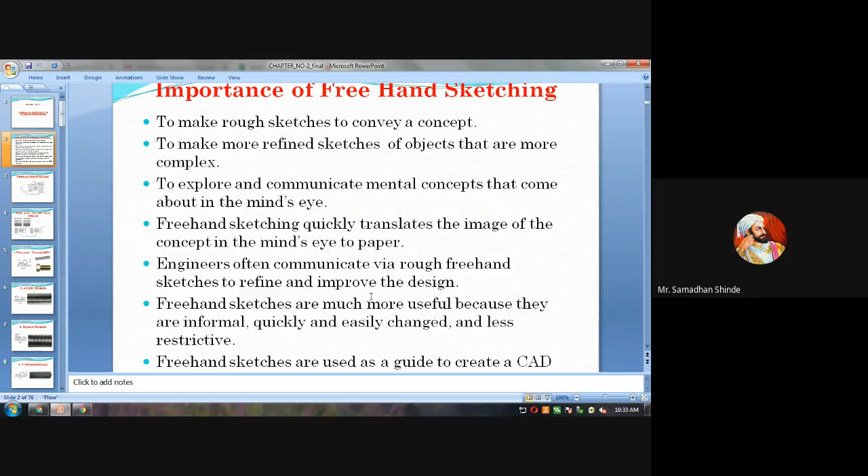Chapter 2, freehand sketching of machine components. We studied first the importance of freehand sketching, irrespective of having n number of tools to draw the drawing, softwares, etc. Still we have this chapter in the syllabus because we discussed making a rough sketch to convey the concept. If we want to draw the rough sketch, we should have the knowledge of freehand sketch.

To make the more refined sketches, a particular drawing is more complex, it cannot be possible to understand easily. So in that case, we can draw a simple drawing instead.

Then, to explore and communicate mental concepts. If an idea is there in your mind and you want to do something, you can put it on paper directly. Freehand sketching quickly translates the image, meaning if some concept is there in your mind, that concept can be transferred quickly onto paper. Engineers often communicate via rough freehand sketches to refine and improve the design.

I gave the example of the Innova car. Irrespective of the fact that Innova was liked by customers, they still made inventions or little modifications to the existing model, so the Innova Crysta came into the market. After that, whatever drawing is available, you can go for its modification up to customer satisfaction.

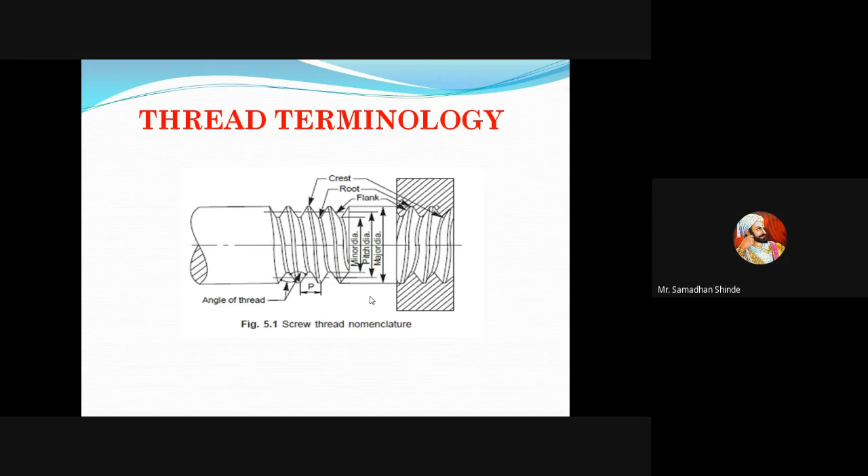We have also seen the basic types of threads: right hand thread, known as RH, and left hand thread, known as LH. So how do you identify, if you hold any nut or bolt in your hand, which is right hand and which is left hand thread? Number one method is orientation.

What does orientation mean? We have to check where the lines are passing from top to bottom direction. From top to bottom, if it is passing towards the right, it is a right hand thread. If it is passing towards the left, it is a left hand thread.

Then there is another method called the rotation method. So first is orientation of threads, another is rotation of nut and bolt. A simple formula to remember: if we rotate the nut or bolt in a clockwise direction and it advances, then clockwise rotation plus advance equals right hand thread.

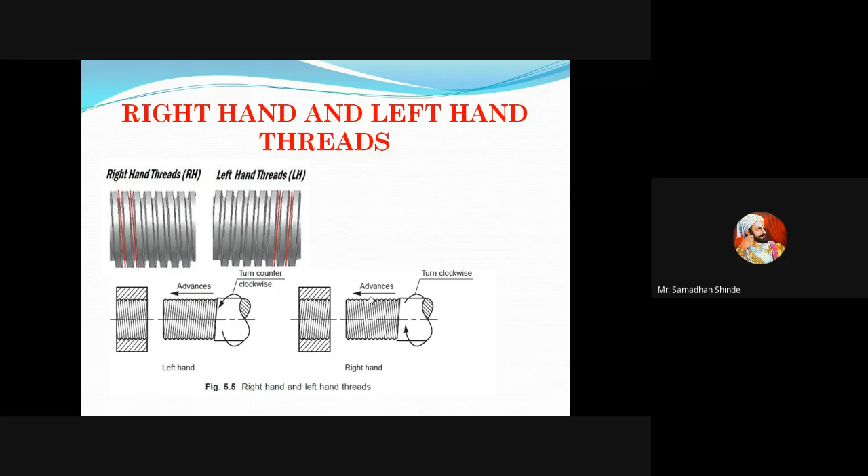If we rotate a nut or bolt in anti-clockwise direction and it advances, then it is a left hand thread: anti-clockwise rotation plus advance equals left hand thread. Clockwise rotation plus advance equals right hand thread. That is the formula.

As discussed, we need to note the angle of thread and the application for each type. With Whitworth thread, the profile is given, angle is 55 degrees, and the application is leak proof applications.

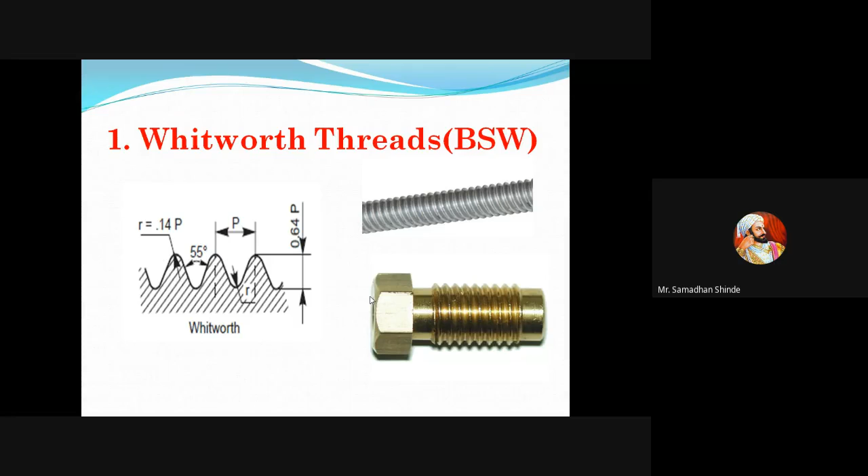Then Acme thread, also called ACME thread. The angle is 29 degrees, and bench vice is the application. In our workshop such types of threads are available.

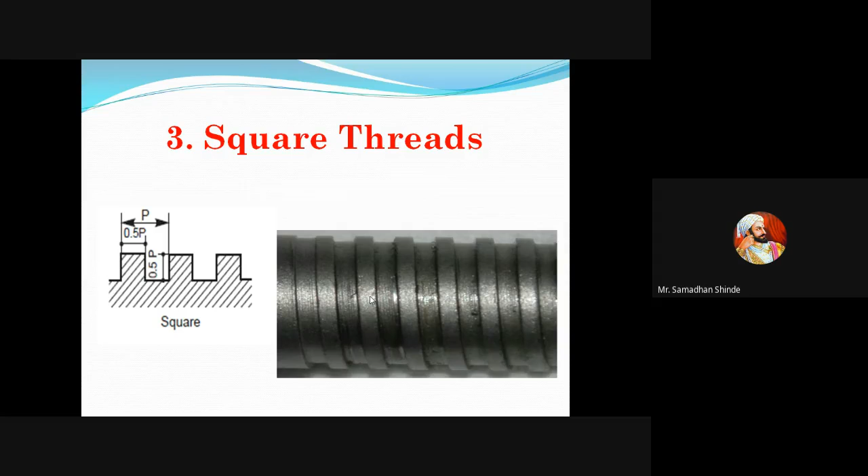Square thread: here the thread angle is 0 degrees, but the profile of the thread is perpendicular to the axis. The application of this is screw jack.

Then V threads, also called sharp threads, or metric thread. The angle is 60 degrees, and nut and bolt is the application.

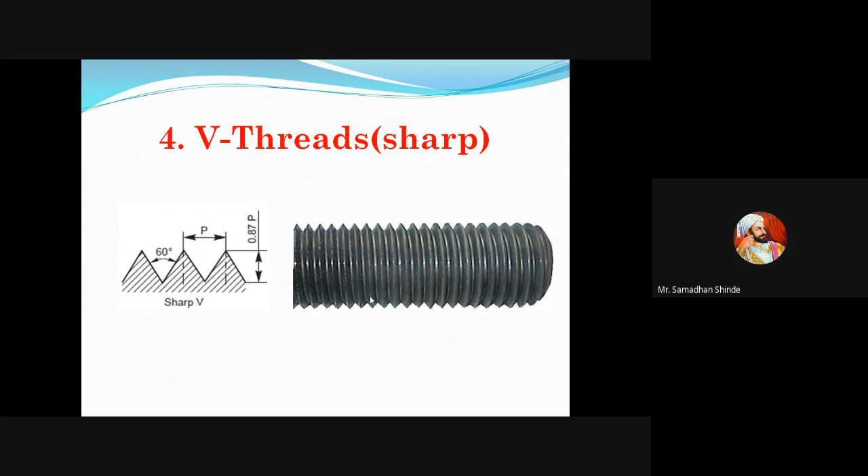Buttress thread: one profile is at 45 degrees and one profile is perpendicular to the axis. The application is conveyors in mills, used when we want one directional power transmission.

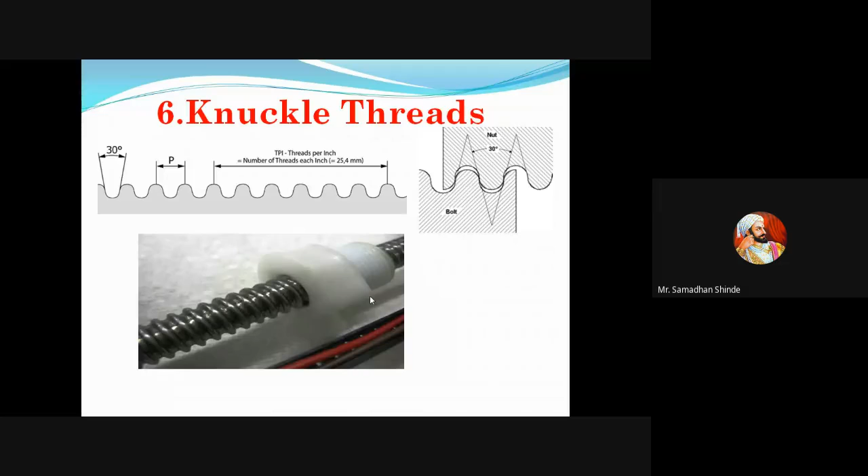Knuckle thread is also called plastic component thread. Mainly these threads are used for plastic components. The angle is 30 degrees.

So that we have seen types of threads. Then we have nut and bolt, types of nut and bolt. In this there are various types of nut and bolt based on types of thread: one is having internal thread, another is having external thread.

Bolts are having external threads and nuts are having internal thread. We have also seen the symbols: for internal thread, the internal circle is complete; for external thread, the external circle is complete. It is as simple as this. To remember: nuts have internal thread, internal circle complete; bolts have external thread, external circle complete. So types of nut, these many types are there.

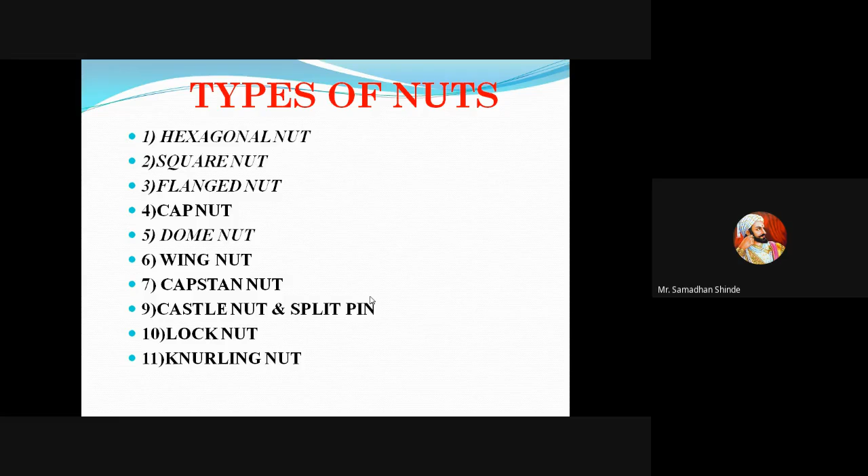First one is hexagonal nut, bounded by hexagonal periphery. We have seen different points in this: how much is width across flat for this nut, and width across corner.

If you remember, thickness of this bolt, T, is equal to D. This dimension we have seen is 1.5D plus 3. Width across flat and width across corner are important terms we have seen: 2D and 1.5D plus 3.

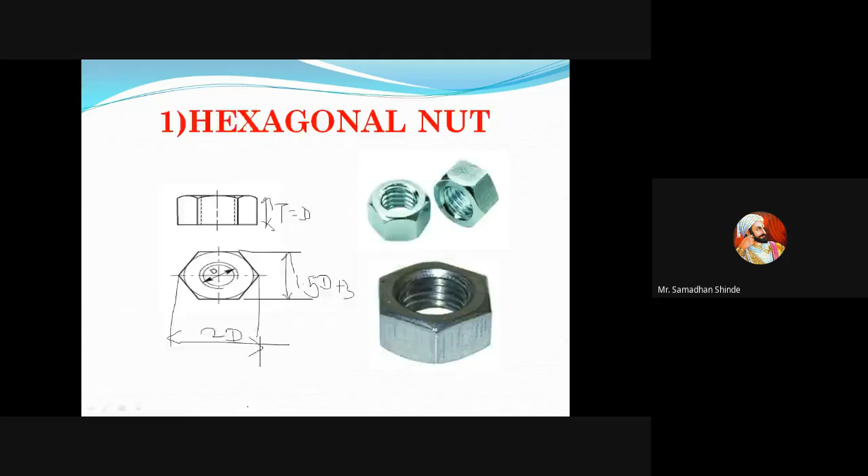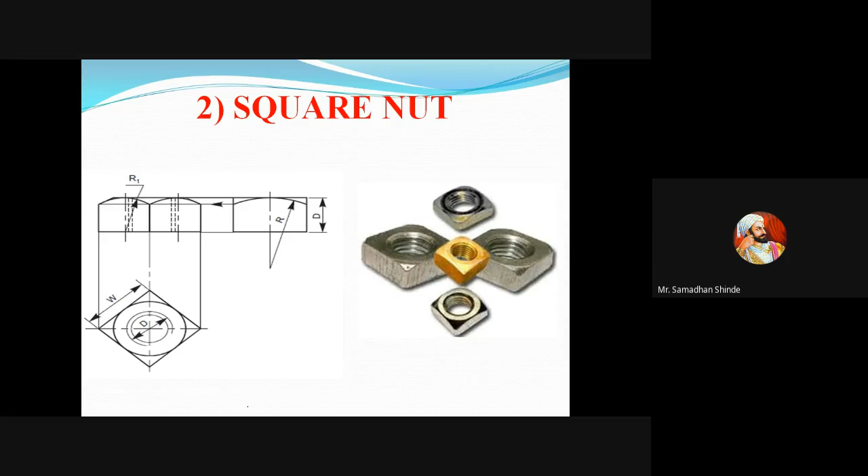Similarly for square nut, instead of hexagonal boundary, it will be bounded by square periphery. Here also same terminology: thickness T equals D, and width across corner and width across flat are the same.

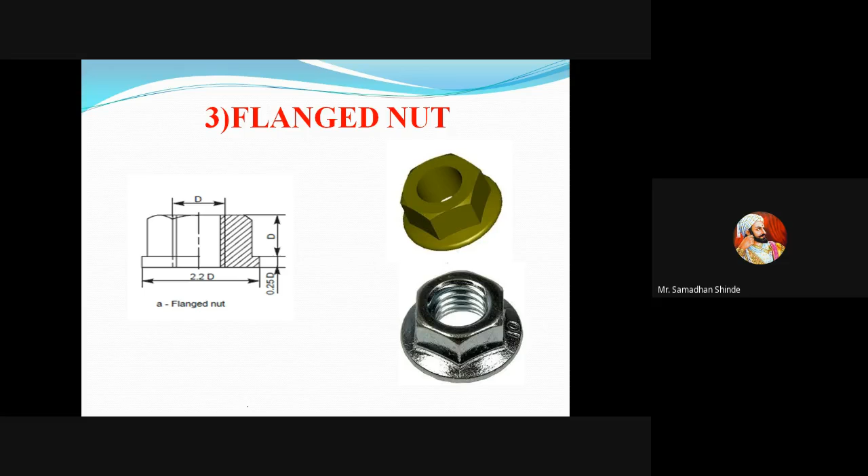Then flanged nut: if a nut has a washer at its bottom, it is called a flanged nut. This nut will avoid use of a separate washer. It's simply a hexagonal nut with a washer only at the bottom, that is the specialty of this nut.

Then dome nut and cap nut. The specialty of these two types of nut is that they will not allow the end of the bolt to come outside the nut, avoiding injury to the operator, especially if these nuts are always in a moving position.

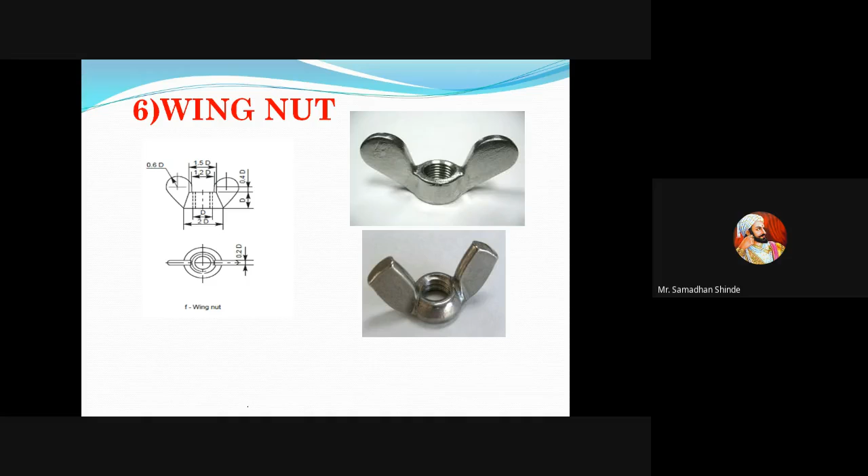That is the importance. Then wing nut: you have to remember wing nut means frequent adjustment. When we want to have frequent adjustment in an assembly, then it is called a wing nut. A famous example of wing nut use is a hacksaw.

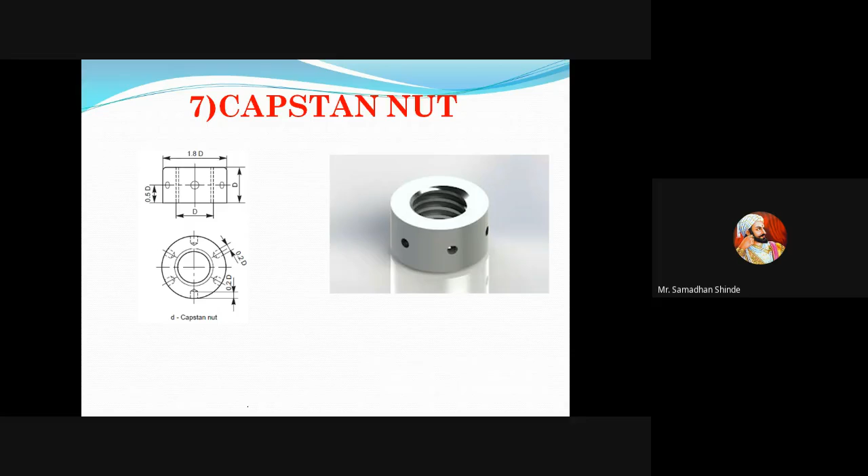Then ring nut, another name is retaining nut. It holds a particular part in its position. In a bicycle, near the handle and pedal, this type of nut is used to hold the particular component in position, called a ring nut.

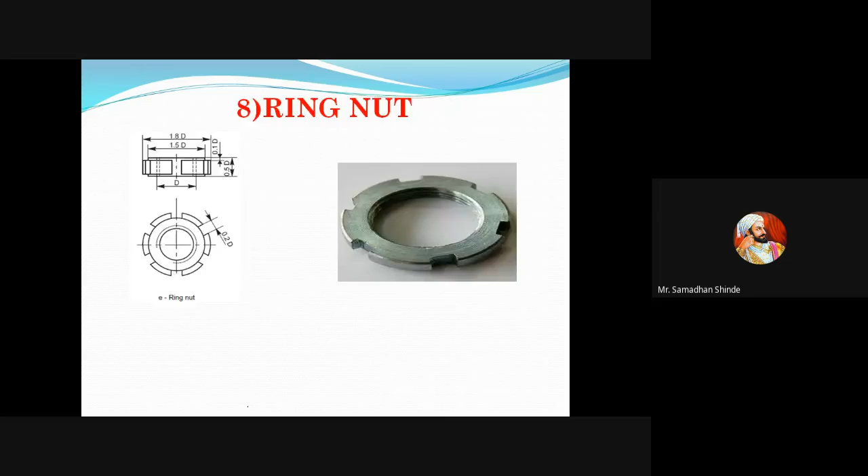Castle nut: two types of nut are there, one is castle, another is lock nut. So what does castle mean, and what is the lock nut?

So what does it mean by castle nut? Castle nut is used whenever there are frequent vibrations, or our particular component is suffering a lot of vibrations. In that case, two types of nuts are used: one is castle nut, another is lock nut. Castle nut is having slots on its periphery at one end, and a split pin is used. This split pin is used to prevent the nut from coming out of the bolt. It is called castle nut.

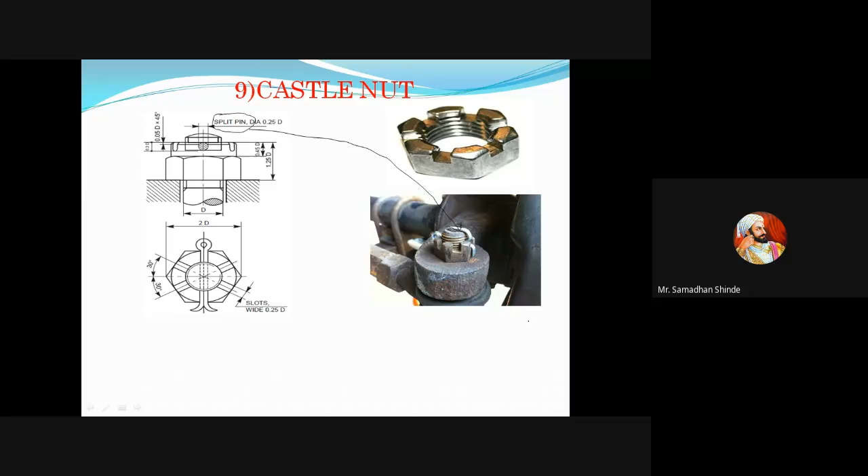Then lock nut. What you have to remember in case of lock nut: one bolt, two nuts - nut number one, nut number two. Whenever there is one bolt and two nuts are used on the same bolt, then it is called lock nut. Same concept applies here - two nuts on a single bolt, only one bolt.

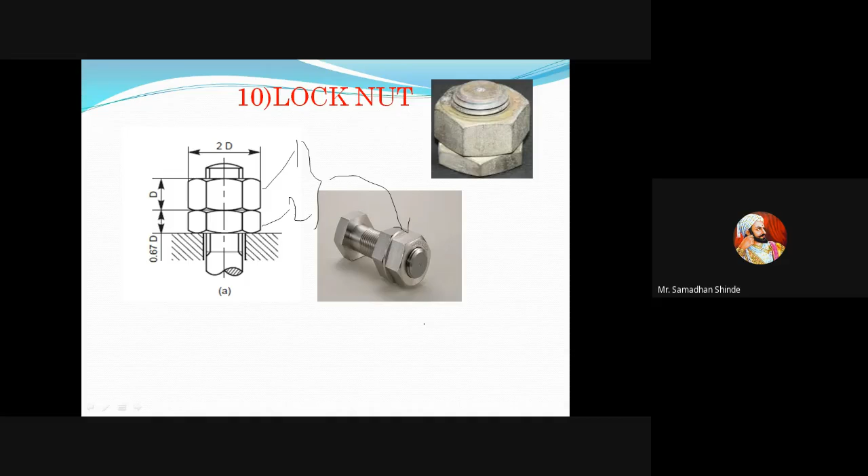So an example we have seen is mirrors of a two-wheeler. Once the two-wheeler is moving, its handle gets a lot of vibrations, and to fix or tighten the mirror with its handle, a lock nut is used.

And the last one we have seen is knurling nut. What does it mean by knurling nut? It is having knurling on its periphery. In BIS convention - maybe day after tomorrow I will take revision of BIS convention - what does it mean by knurling nut? It is having knurling on its periphery. Two types of knurling are there: one is parallel or straight knurling, and diamond knurling.

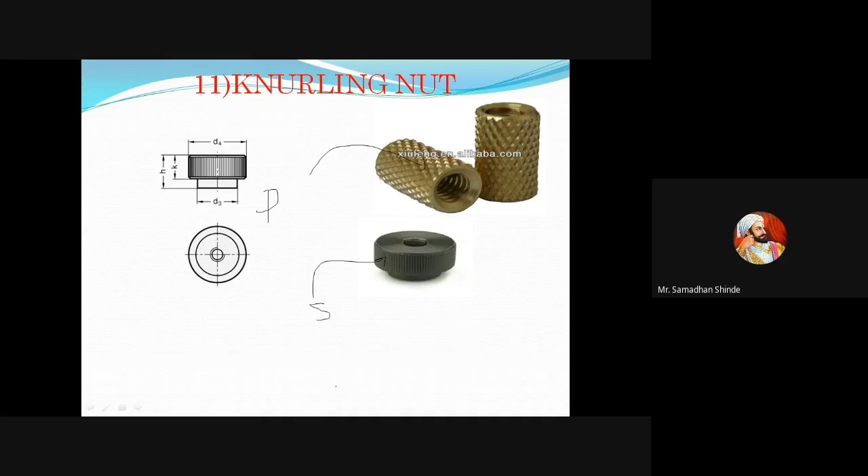Out of that, a cross structure is there, it is called diamond. So first nut is diamond, I will write only D. And another nut is called straight knurling. I will write straight knurling and diamond knurling, like this.

So then we have seen types of bolts. What are the different types of bolts? As far as nuts, we have seen many types; thereafter we have seen bolts. First is square headed bolt. If the head of the bolt is something like this, square, then it is called square headed bolt. Due to availability of limited space, this type of bolt is used.

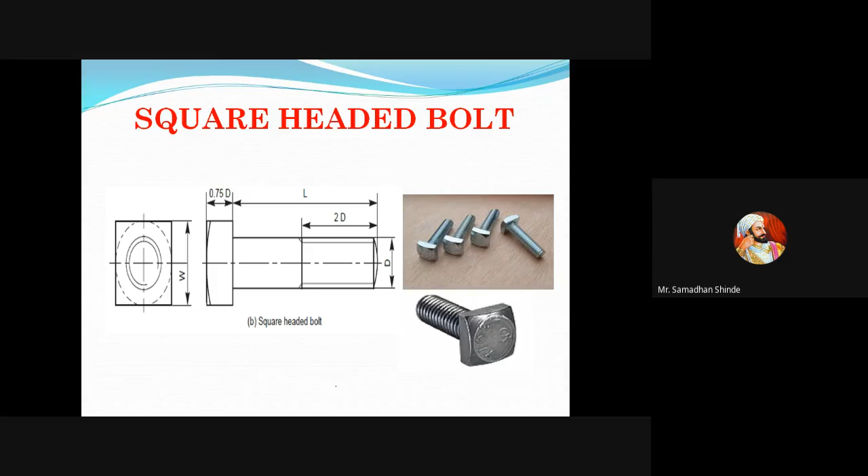And what does it mean by hexagonal headed bolt? Hexagonal headed nut, hexagonal head - that is as simple as the square headed nut. So bolts are mainly classified into: one is head, another is shank. So square headed bolt, hexagonal headed bolt, T-headed bolt - it is used mainly with milling machine.

Whenever there are slots in a machine, means like this - these slots are there. So what does it, like this solid part - I will go for hatching like this. So this part is hollow. So what can be done? This nut is directly taken and placed here, something like T, inverted T. So these type of nuts are something like inverted T - that's why it is called T-headed bolt. It is used in milling machine.

Once we go back to college, many more machines are there whose bed is having something like this T-slotted design. In our machine tool processes subject next semester, you are going to see different types of machines. In that, you will come to know what this T-headed slot is - such slots are there.

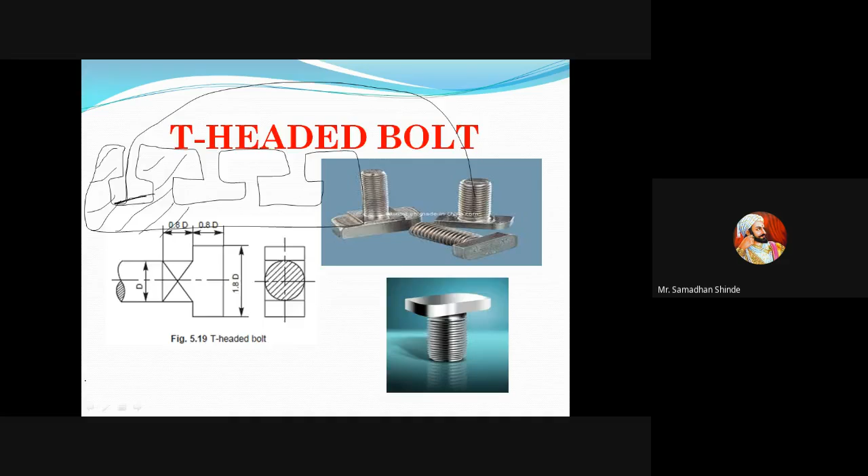Then cup-headed bolt. Cup-headed bolt - limitation of space. Whenever there is limited space, this type of bolt is used. Example is benches - on benches such cup-headed bolts are used.

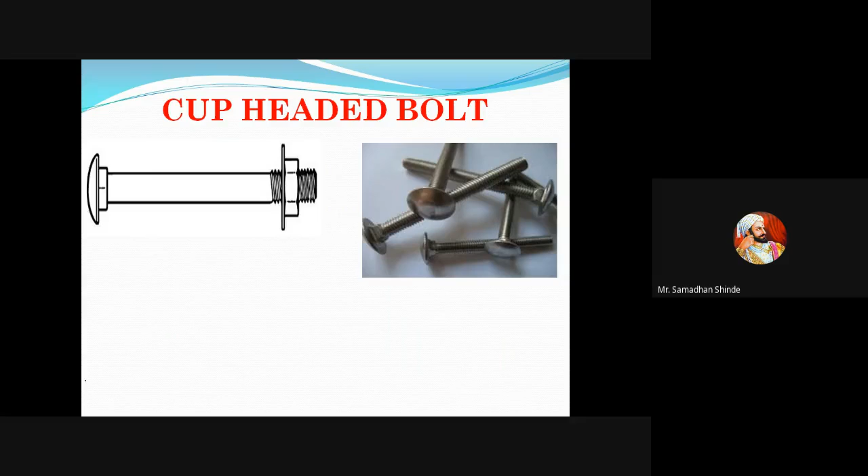Then rag foundation bolt and eye foundation bolt. As the name is foundation bolt, these bolts are used to fix the machine with their foundation. One is a rag, another is eye foundation bolt. So you can remember, to fix the machine with their foundation, these types of bolts are used. What is the working principle of rag foundation bolt?

On its edges there are serrations. Serrations means threading. If you see this large diagram, it's a combination of machine parts - nut, bolt, washer, etc. On its edges there are serrations, and this bolt is fixed into concrete. So once the machine is fixed with its foundation, it will not come outside the foundation easily.

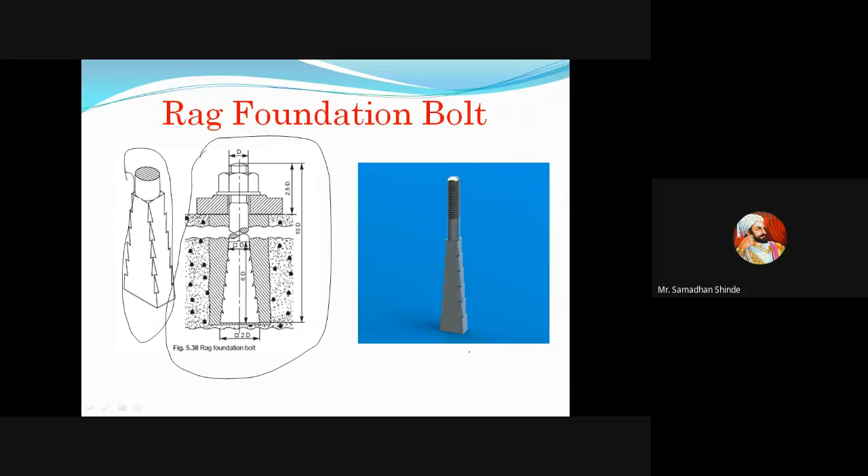That's why it is called a rag foundation bolt. Another one is eye foundation bolt. One of the ends of the bolt is converted into eye shape, and a cross rod is used to fix the machine with its foundation. That's why it is called an eye foundation bolt.

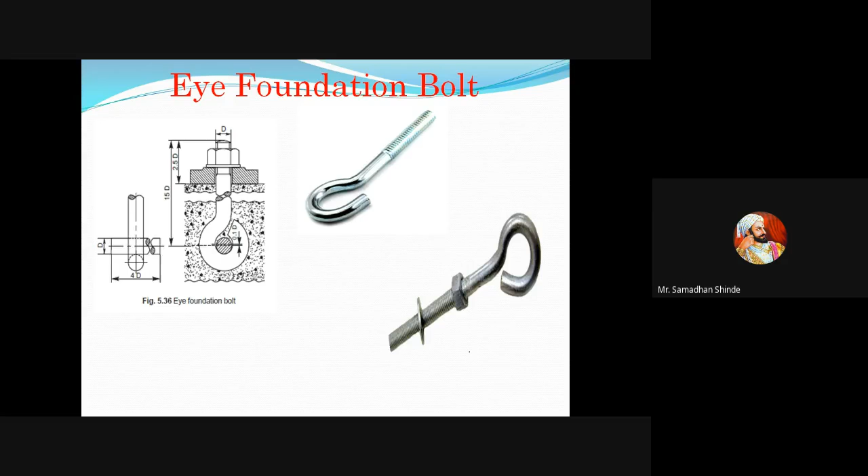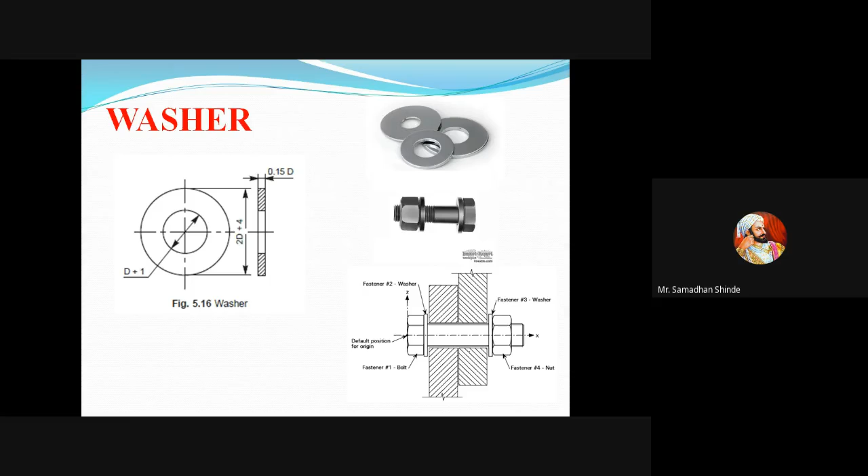Washer - we have seen what it means and where we use it. The main purpose of washer is to increase the contact area between clamping parts. As far as technically, we should remember that once area increases, stress decreases, since sigma equals P by A. Number two, it helps for tight fitting between two parts.

Then we have seen riveted joint. Before that, we saw types of rivets - which are the different types, what is their function, and how are they classified. Mainly, like bolts, rivets are also classified into head and shank.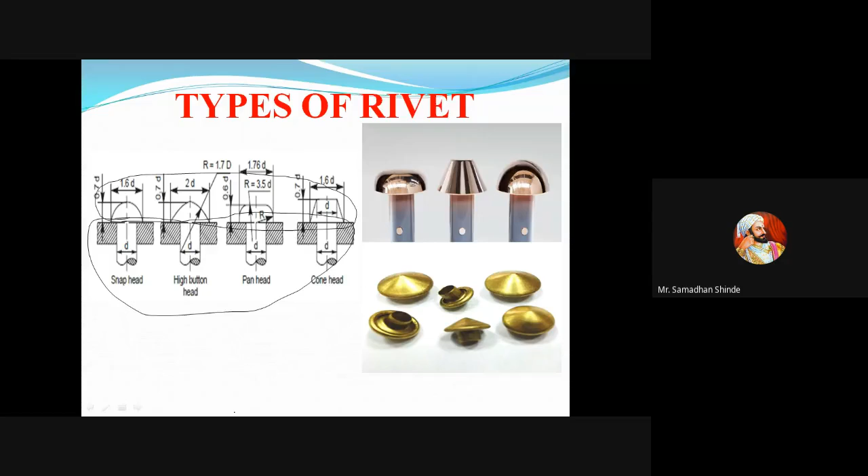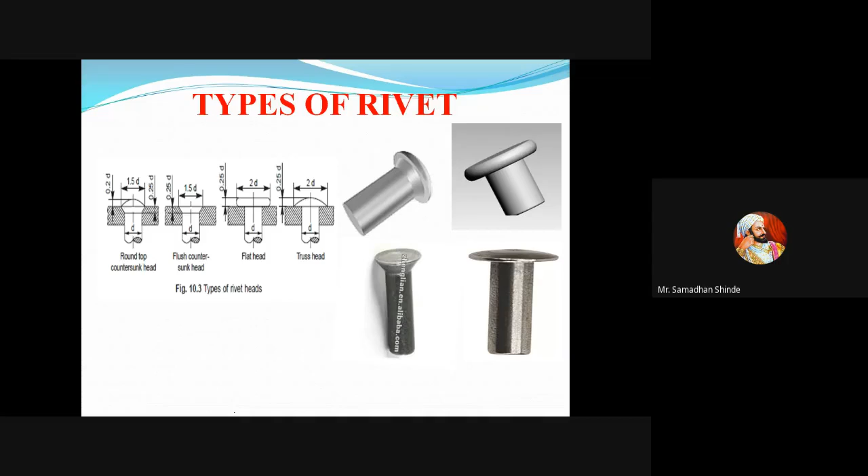As far as different heads are concerned, there are different types of rivets based on head shape. First one is snap head, high button head, pan head, cone head, etc. These are not very important, but for riveted joints we should know round top countersunk head, flush countersunk head, flat head, truss head, etc. This is important as far as our syllabus is concerned.

Types of riveted joint - which are the different types? First one is lap joint and butt joint. As we discussed, lap and butt. In lap joint, plates overlap each other. In butt joint, the plates are kept in front of each other.

We have seen that when plates are kept overlapping each other - when plates are thin, lap joint is used. On the other hand, when plates are thick, butt joint is used. So what is this lap joint? Suppose there is one plate, another plate will be overlapped like this.

Now what is done in butt joint? There is one plate, another plate like this - two plates are kept in front of each other, just. This line is very important once you are going to draw. We should know two plates are kept in front of each other. So this joint is very important.

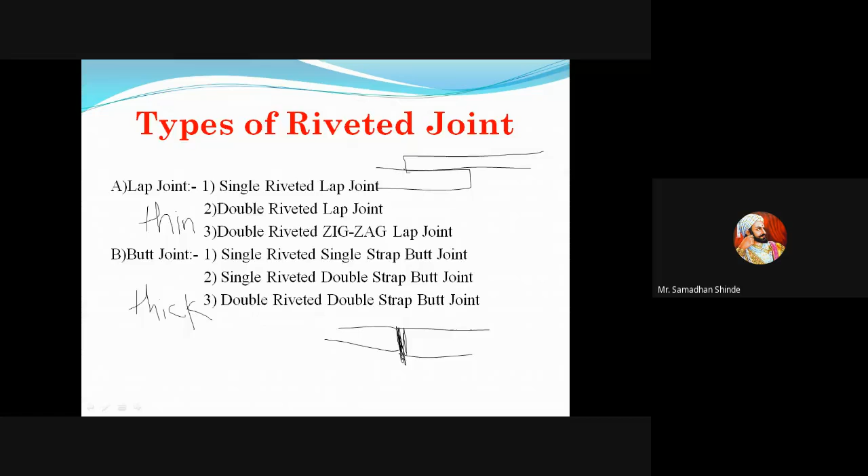Then there are different types of lap and butt joints. Out of that, first one is single riveted lap joint. We have to break this name down - is it a type of lap joint or butt joint? As it is a type of lap joint, plates are overlapped each other.

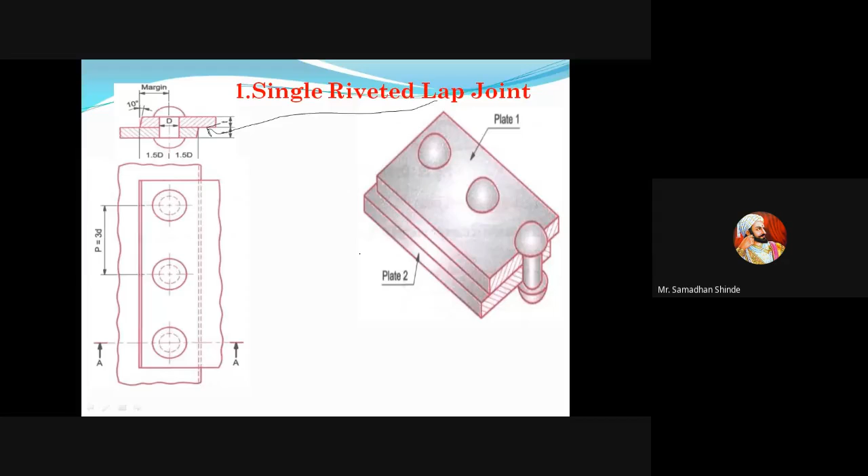As it is a type of lap joint, plates are overlapped here - plate number one, plate number two. What does single riveted mean? Single riveted means there is one row of rivets in each plate. As the plates are overlapped, that row of rivets will be common.

Then double riveted lap joint. Again we check, is it lap or butt type? As it is a type of lap joint, then double riveted - what does double riveted mean? Double riveted means two rows of rivets in each plate.

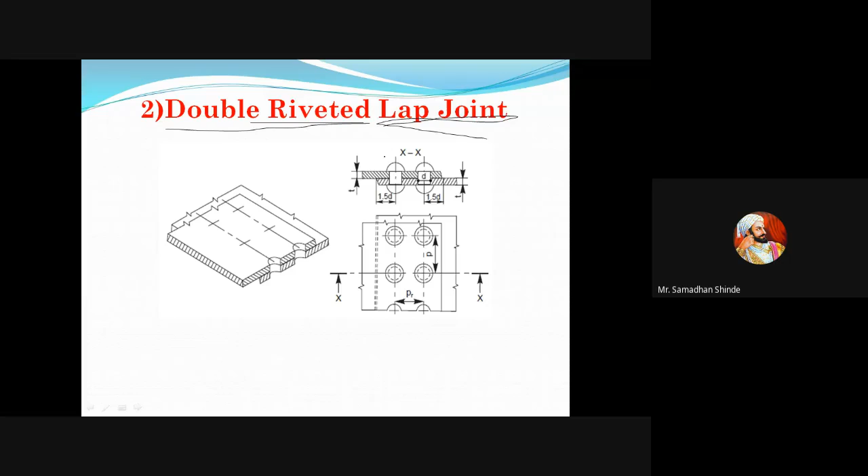That is the next one, double riveted zigzag lap joint. Zigzag means alternate or Z shape. So what is this in this case?

What does it mean by double riveted zigzag lap joint? There are two plates which are overlapping each other, and two rows of rivets are arranged in alternate or zigzag shape. That means there is one rivet in between two.

Then, butt joint. What does it mean by butt joint? Two plates are kept in front of each other. It is nothing but a butt joint.

In this, again, different types are there. Number one, single riveted single strap butt joint.

What does it mean by butt? Butt is nothing but in front of each other. What does it mean by single strap? If you see the actual working principle of this, you will come to know that in a butt joint, plates are just kept in front of each other like this. So actually, it is not possible to join this directly.

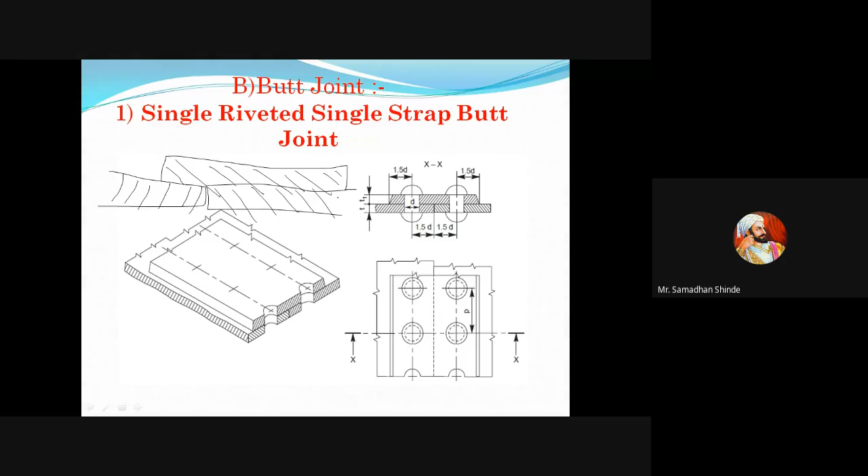So that's why a third plate is used. It is called a strap or cover plate. Okay, then single riveted double strap butt joint.

The next type is single riveted double strap butt joint. Butt joint is nothing but two plates placed in front of each other. Double strap means two straps will be used instead of one. One is from the top, another one is from the bottom.

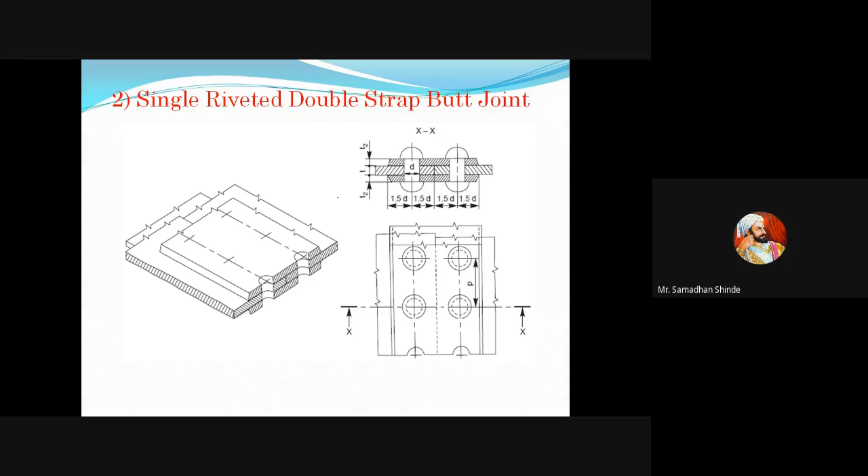And what does it mean by single riveted? Single riveted is nothing but a single row of rivets in each plate. That is the importance. Then, double riveted double strap butt joint.

What does it mean by double riveted double strap butt joint? In butt joint, plates are kept in front of each other. Double strap means there are two straps, one from the top, one from the bottom.

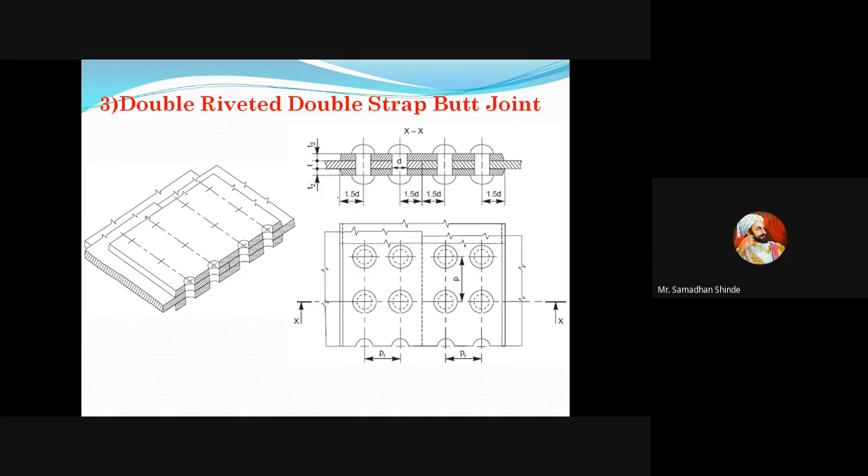And double riveted means what? There are two rows of rivets in each plate. That is the importance of double riveted. So that we have seen.

So what does it mean by lap and butt? Lap means plates are overlapping each other, and it is used for thin plates. What does it mean by butt joint? Plates are kept in front of each other, and it is used for thick plates.

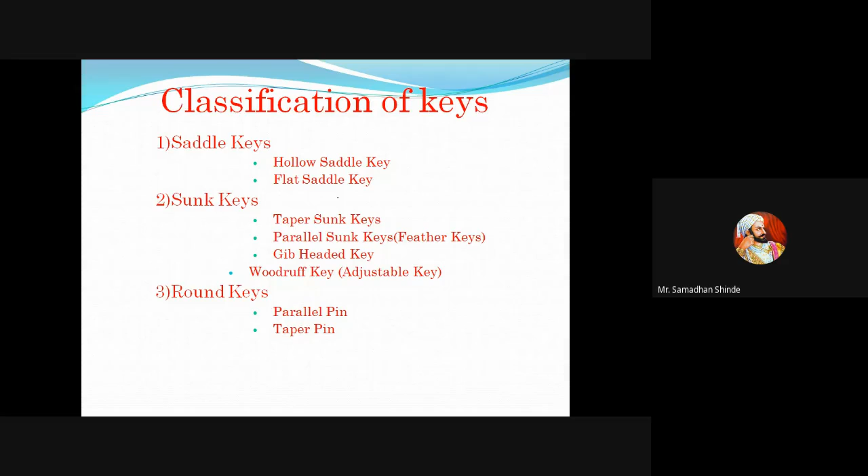That is the importance. Then we have seen classification of keys, or what does it mean by key? So when this word comes into picture, what is the definition? You have to remember RRM.

What is the long form of RRM? Many times I have explained this. Relative rotary motion. Correct, relative rotary motion. Very good.

RRM, relative rotary motion, so that sentence you can form. It is a mechanical element which is used to avoid or prevent relative rotary motion between which two parts? One is shaft, another one is mounting. You can see here shaft and mounting. So there will be one shaft.

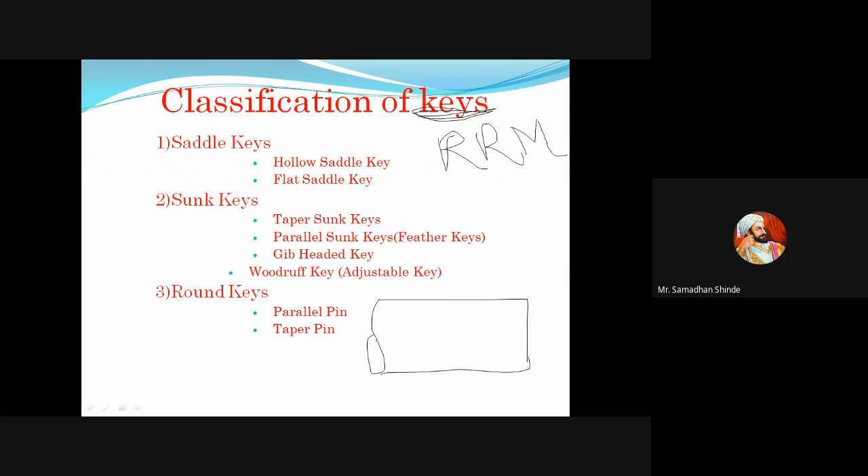Okay, shaft, and its mounting means what? Something mounted on this, like a gear. If something is there, maybe like this, something is mounted.

If this shaft is going to rotate in this way, suppose with a certain RPM, it is expected that this mounting, maybe gear, pulley, flange, etc., should also rotate with the same speed. This is possible only once we use a key here.

Then it becomes possible to rotate both these parts with equal RPM. That's why the definition of key is: it is a mechanical element which is used to avoid or prevent relative rotary motion between these parts.

One is shaft, and another one is mounting. I will say two, these two parts, one and two. One is shaft, another one is mounting. In between these two parts, when we want to avoid relative rotary motion, then keys are used. Then we have seen different types of keys. So what are the different types of keys?

Out of that, one is saddle, another one is sunk, and a third one is round key. So this also we have seen. Saddle, so as far as machine drawing is concerned, what does it mean by saddle? Saddle means just kept on the shaft, as simple as this. It is just kept on the shaft.

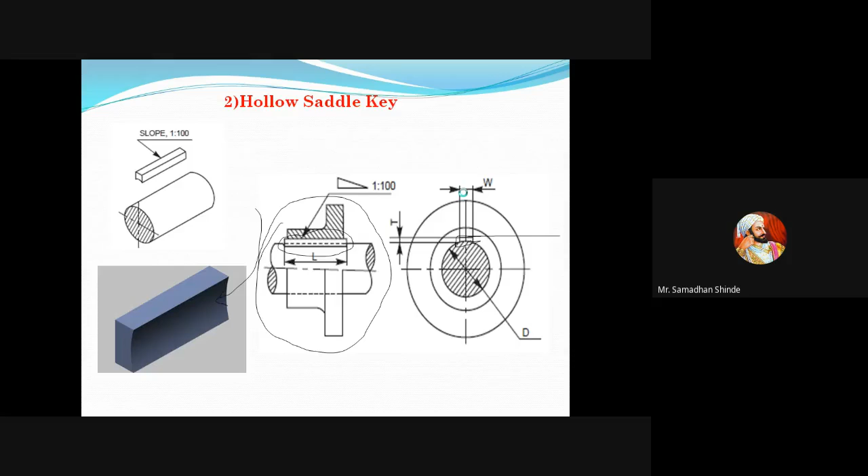Earlier there was not such case, so here you can remember it was not there. Here also it was not there, it was just kept on the shaft. That's why it was the example of saddle key, saddle flat, that we have seen.

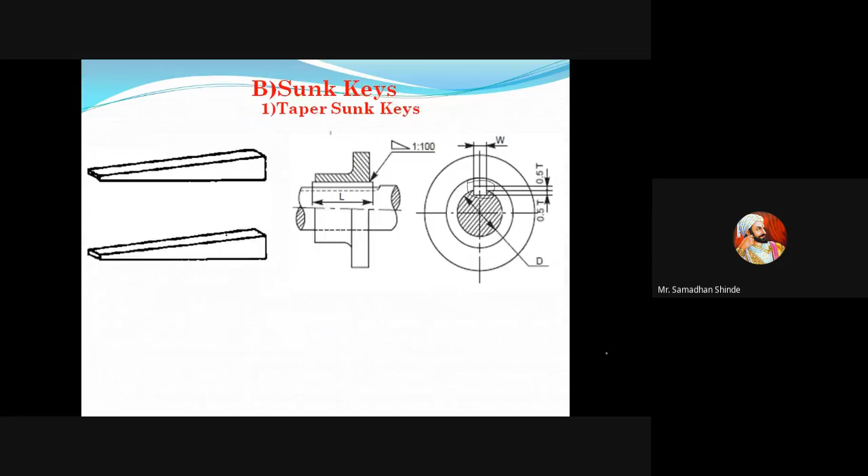Then parallel sunk key. It is parallel, and it is interpenetrated into the shaft. That's why it is called as parallel sunk key. Okay, then gib-headed key.

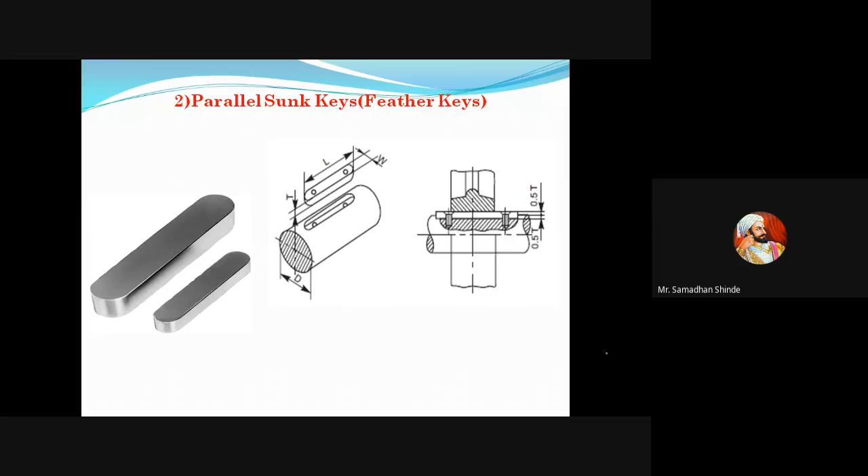GIB. What does it mean by gib? It is a projected part which is used to remove the key from the assembly. We can say that's why this part is known as gib-headed key. It is called a gib. So it is used to take the part out

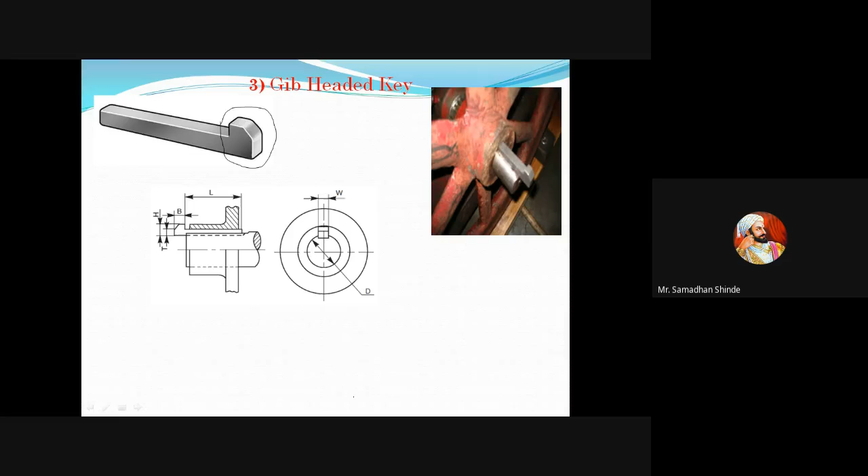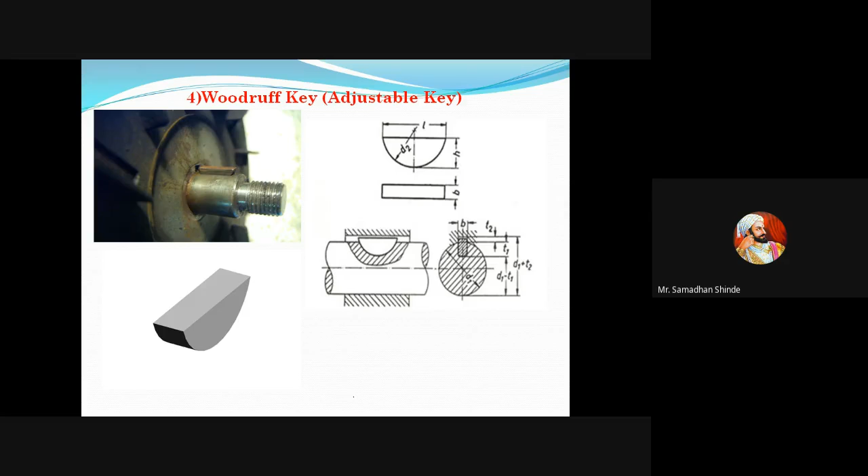of the key. It is an example of a sunk key. Woodruff key, again it is a semicircular key which is used to connect the flange and shaft, something like this.

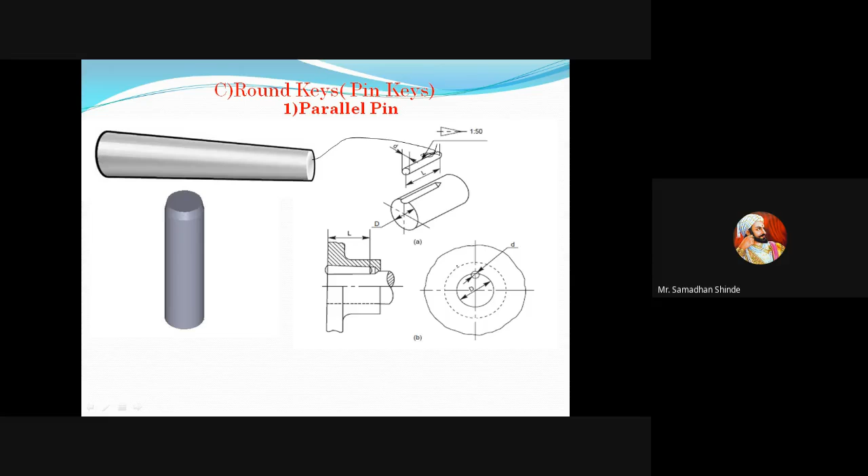Round key, shape depending upon shape only, it may be tapered or flat, no problem. So round key, its shape is something flat, or we can say round, that's why it is called so. Here you can remember simple type of key, round key, which are used to avoid RRM, relative rotary motion, between whom one is shaft, another one is mounting.

Then we have seen coupling. Couple means two. What does it mean by coupling? Coupling is a mechanical component which is used to connect two shafts. TWO. It is simple, that's why it is called coupling. So you can remember coupling two shafts.

So how to remember? In your technical interview, TI, it will be used. Coupling two shafts, you can remember for your information. What does it mean by coupling? Coupling is nothing but two shafts, like this. So shaft couplings are used to join or connect two shafts in which when they are joined together, they will act as one unit. That is the simple definition.

Then rigid, flexible, loose, non-aligned. These are the examples. Which are they? One is rigid, another one is flexible, another one is loose and non-aligned. These are the examples of such types of couplings.

So what does it mean by rigid? Why is it called rigid? In applied mechanics, you have seen the example of a rigid body, the body which will not get deformed. It is called rigid. So what is meant by rigid?

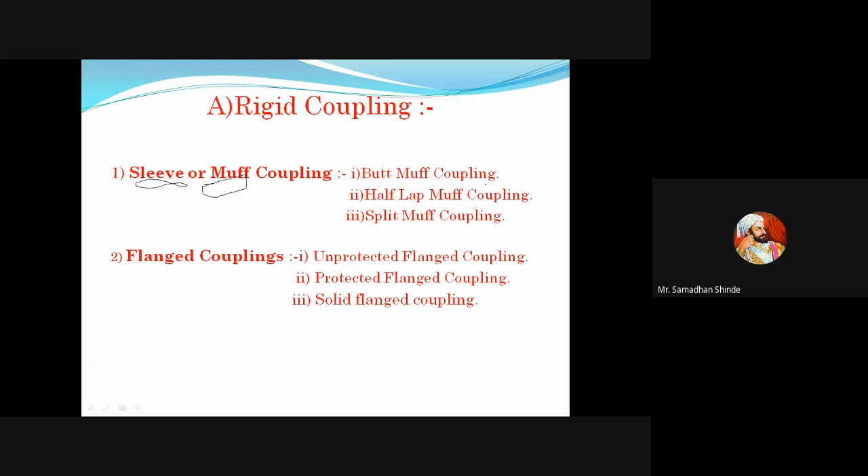So rigid coupling is of mainly two types. One is muff, another one is flanged. In that, muff coupling is again divided into different types. So as we have seen, what does it mean by

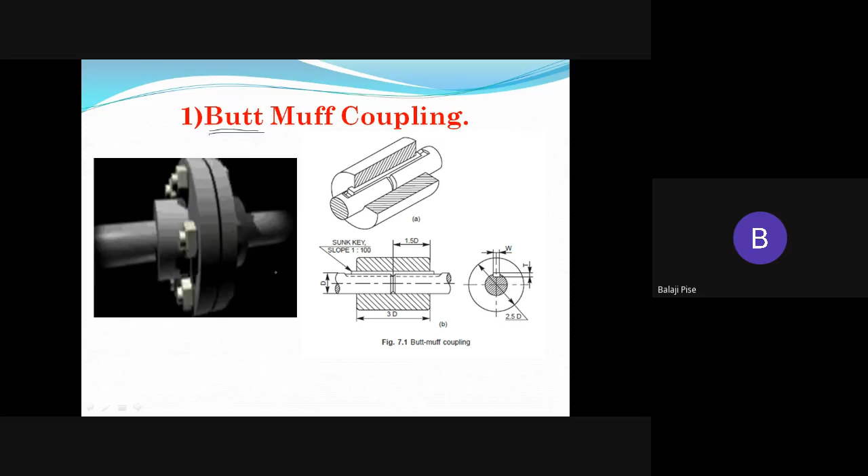butt muff coupling? Number one, butt. What have we seen as the meaning of butt in machine drawing? What is the meaning of butt, B-U-T-T? It means in front of each other.

So shafts are placed in front of each other. Here there is shaft number one, here there is shaft number two. These two shafts are placed in front of each other and a key is used. Here there is the key, I will write K, and this is the cover or muff, I will write here like this, cover. It means two shafts are placed.

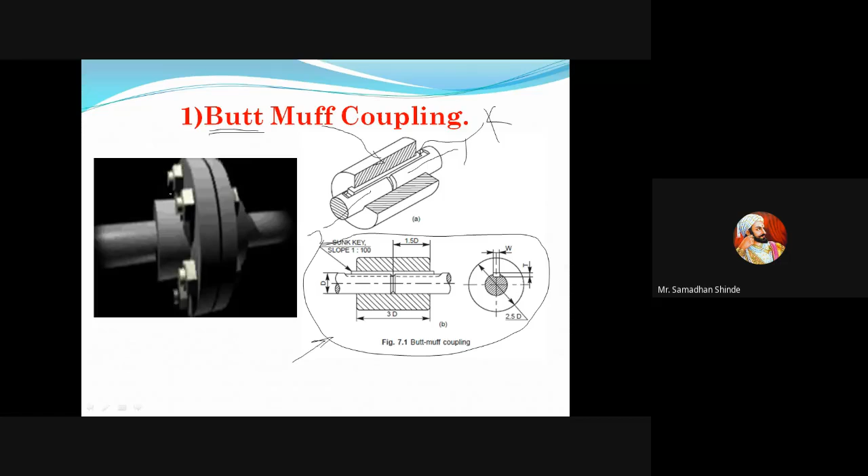So this 2D diagram is important as far as our university exam is concerned. It will be asked in the university exam: draw a freehand sketch of butt muff coupling. So this diagram is important. This 3D animation etc. is just for our information. Actually it is not flanged, it is an animation of flanged coupling, but I have kept it here for remembering.

Then half lap. This word comes up again and again in machine drawing. Lap, what does it mean by lap? Overlapping each other. Two shafts are overlapping each other. Is it the case? Shaft number one, shaft number two are overlapping each other. In what way? Here there is shaft number one, shaft number two. Half end of the shaft will get overlapped with another end, that's why it is called half lap.

And what does it mean by muff? Again it is covered. That's why it is called half lap muff coupling. So my simple question, whether key is used in this case, half lap muff coupling? Whether key is used?

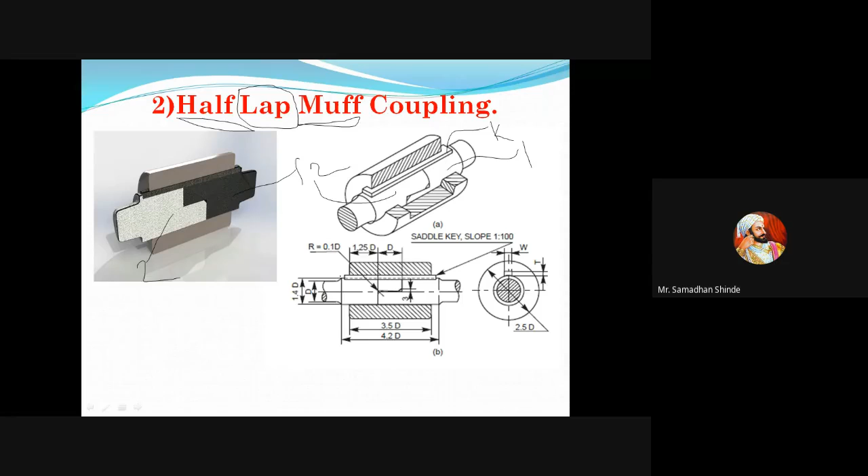Whether key is used? Anybody? Yes, key sir, is used. So here there is a key. Key is used for joining the shaft, or same I will show here also. So here also key is used. So it is called as key.

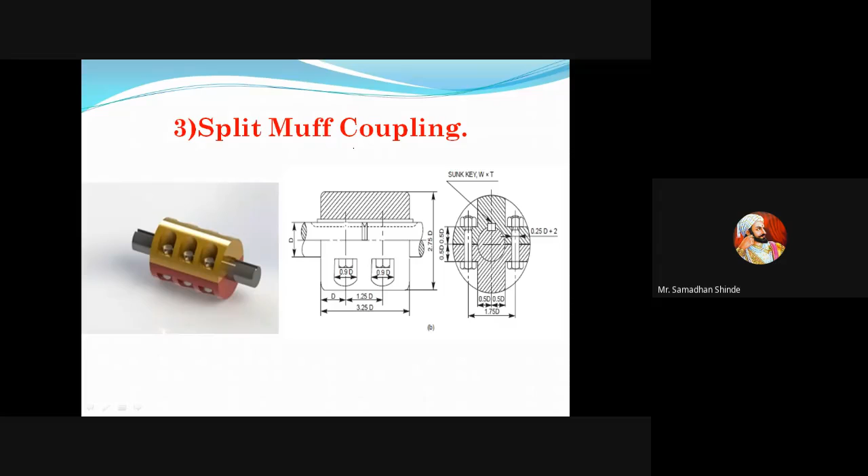So, split muff coupling. So here there is nut and bolt.

Then flanged coupling. So we have seen what is the flange. So what does it mean by flanged coupling? Flanged coupling. So mainly there are two types: one is protected and unprotected. So both are types of flanged coupling. On a shaft, these flanges are mounted. So one is protected, another one is unprotected.

Okay, now we have seen solid flanged coupling. What does it mean by solid flanged coupling? The end of the shaft itself is converted into flange. That's why this solid name came into picture. Keep in mind, why it is called solid. Solid in this case.

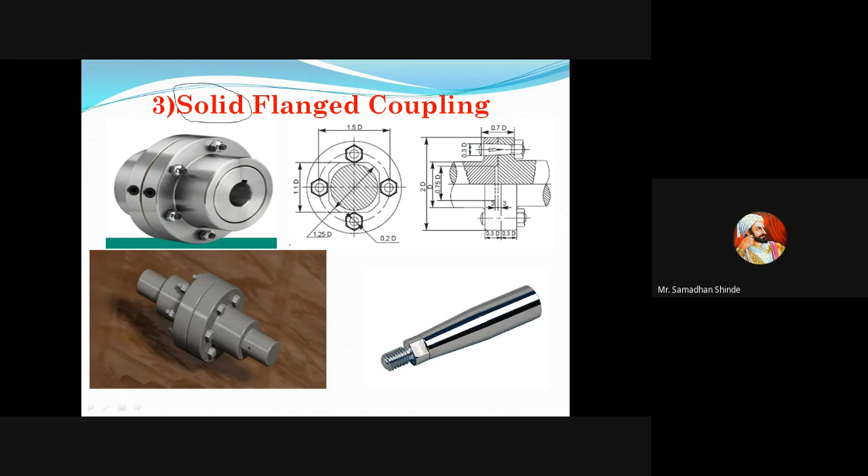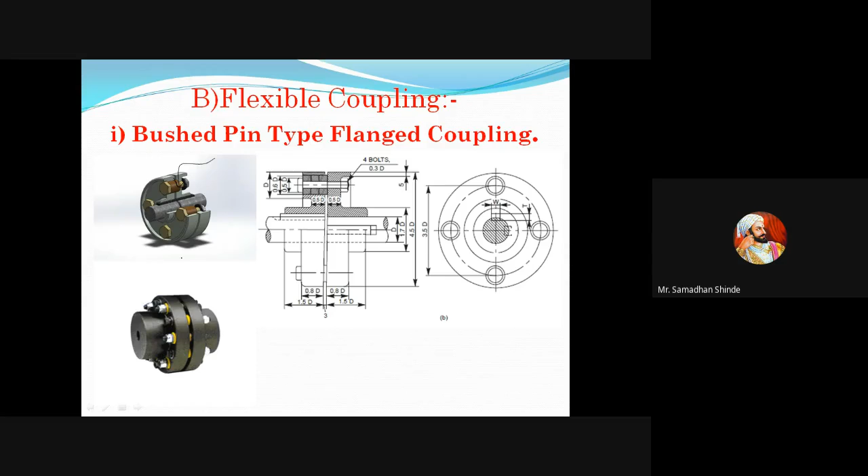Then flexible coupling. So it is a type of simple flanged coupling. How does it become flexible? When two flanges are connected with each other, nut bolts are used, and around the periphery of that nut bolt, rubber cushions etc. are used, so that it will allow a little variation or a little misalignment between shafts. That's why it is called flexible coupling. Keep in mind, that's what it is called flexible coupling.

So what is the working principle in this? One end of the shaft is converted into socket, another end is converted into spigot, and it is fixed into each other. So what is the working principle? This end is inserted into this socket, and then this pin is inserted like this.

Okay, so what is the practical example we have seen for cotter joint? Anybody remembering cotter joint? We have discussed this. In cotter joint, bicycle pedal, very good. Bicycle pedal means once that pedal is fixed to the shaft of the bicycle, it is fixed, and then the cotter pin is inserted.

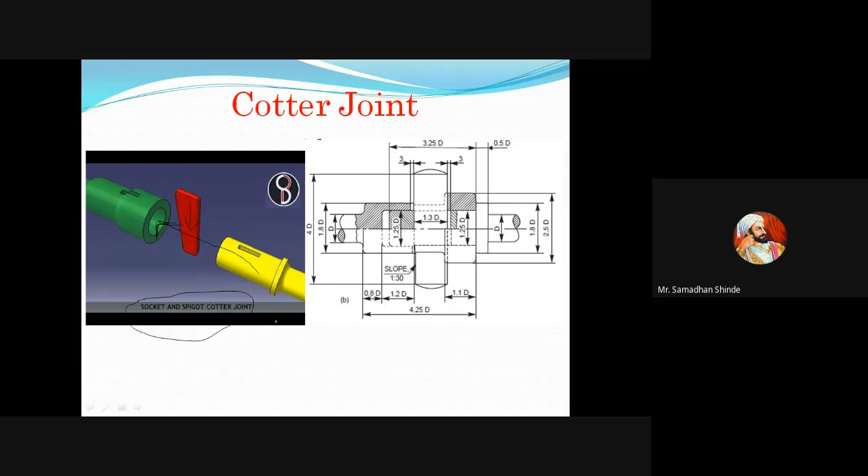For trolley connections, this knuckle joint is used. So what is this knuckle joint? It is also called a pin joint.

What is the working principle of knuckle or pin joint? One end of the shaft is converted into a fork end, like a tuning fork end, as you know from physics. One end is converted into a fork end, another one is converted into an eye, and then a pin is inserted. It is called a pin.

Only three elements are important: one is the fork, another is the eye, and another is the pin. So in tractors, this knuckle joint is used. This is a famous example you can remember. So when we want to join trailers to a tractor, this knuckle joint or pin joint is used.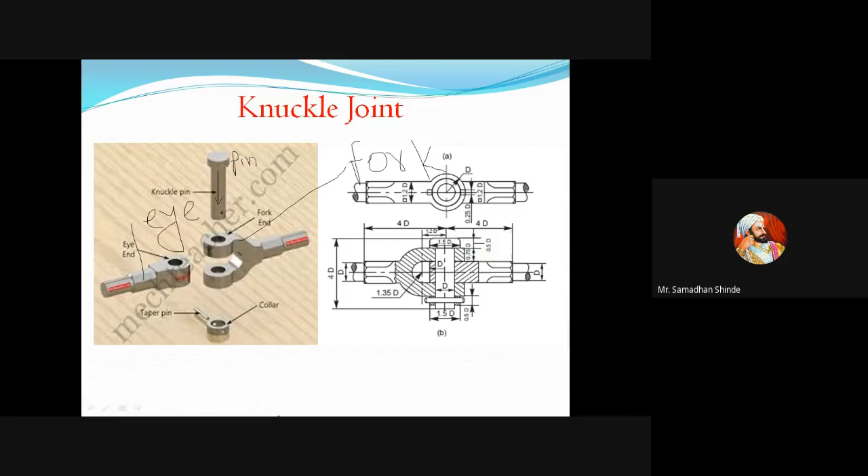Then non-aligned coupling, also called disengaging or universal coupling. Two shafts, both ends of the shafts, are converted into a tuning fork end. You can remember that both ends are converted into tuning fork ends.

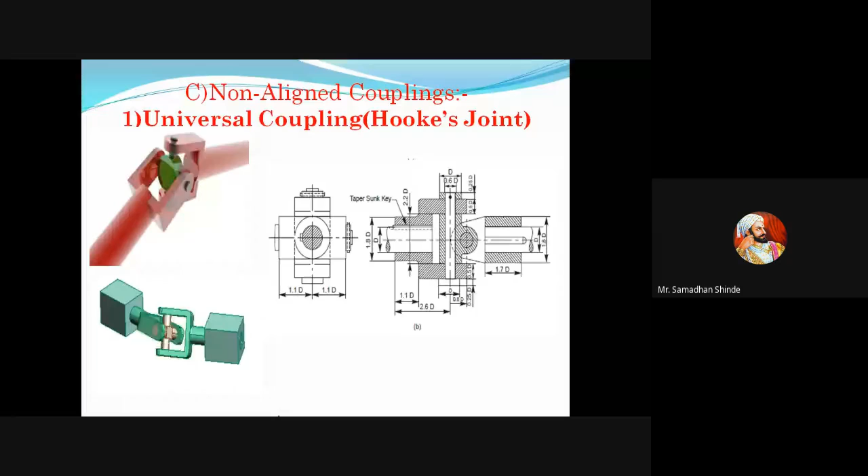And power is transmitted. So why is it called universal coupling or Hooke's joint? Because it can allow any alignment of the shaft. That's why it is called universal coupling, or Hooke's joint.

Then Oldham coupling. Once Oldham coupling comes into picture, you have to remember two parallel shafts having a certain distance between them. When there are two shafts having a certain distance between them, these couplings are used. So what is the working principle of this Oldham coupling?

There are two circular discs mounted on each shaft, or flanges having a slot. Shaft number one and shaft number two are parallel but have a certain distance between them. If you draw the center line, it will not be unique, it will differ, having a certain distance between them. One disc is mounted on one shaft, D1, another on the other shaft, D2, and a central plate, CP, is used.

Let's see the animation carefully. Two shafts are passing, parallel to each other at a certain distance, with a central disc in between. As the shafts move, the discs just slide top and bottom. One care we have to take: when placing the shafts in front of each other, the two slots should not be parallel, they should be perpendicular.

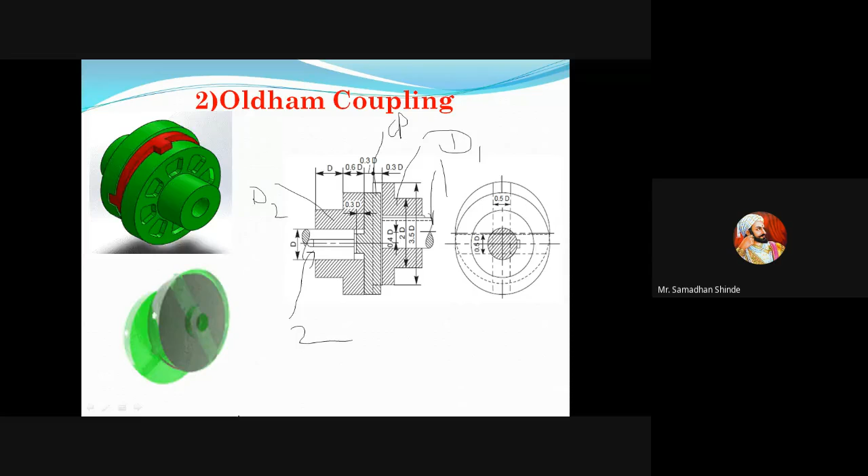Then bearing. In BIS conventions we have seen bearing. So what is bearing? Bearing is nothing but a mechanical element used to give support to the shaft. Support to the shaft is the important function of bearing. Once we want to give support to the shaft, bearings are used, also to give stability, free and smooth rotation, etc.

Mainly there are two types of bearing: sliding contact and rolling contact. The first type is solid journal bearing. Why is it called solid journal? So why is it called a journal? This you have to remember.

Whatever you are writing, journal in an assignment is different, and this journal is different. Journal is nothing but the part of the shaft inside the bearing. This word you have to remember: part of shaft inside bearing is called a journal. Hereafter you have to remember this.

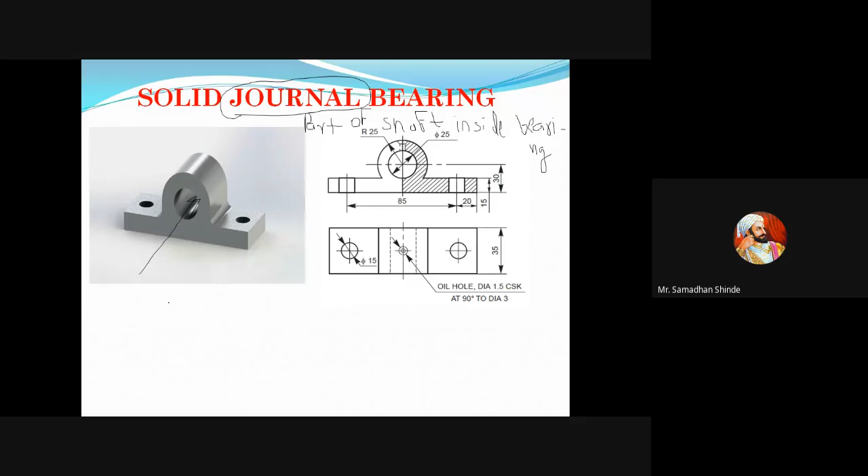Then plummer block. In our assembly and details, this is the biggest diagram, plummer block or pedestal bearing. So what is the speciality of this plummer block? Speciality of plummer block is that it can be disassembled. We can assemble or disassemble.

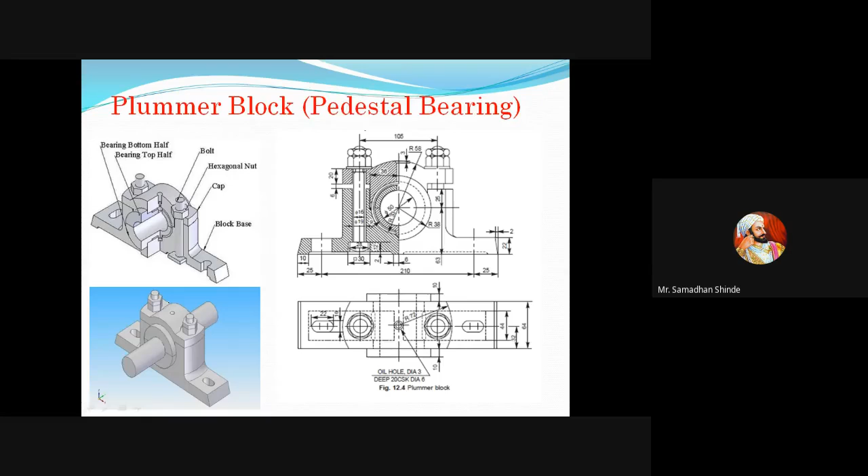By nut bolt arrangement, nut bolt, that's why it can be removed. It can be removed from the assembly. That's why it is called so. Simple, you can remember: nut bolts are used in plummer block. So here there is no question of nut bolt.

Okay, next one is footstep bearing. So what is the speciality of this footstep bearing? In this case, shaft is vertical, number one. And second speciality is shaft is going to end into the bearing. That is the speciality of this footstep bearing. Shaft is vertical and shaft is going to end into this bearing.

Also bush is used. So this is block, or we can say body. Either you can say block or you can say body, something like this.

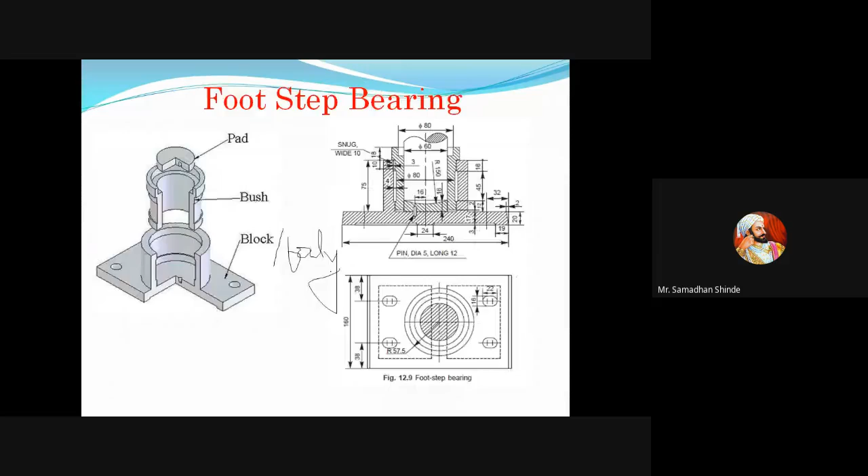Types of pulleys. In basic mechanical engineering, you might have seen flat belt pulley. So when distance between shafts is more, flat belt pulley is used. You can see this simple diagram. These are the pulleys, you have to remember.

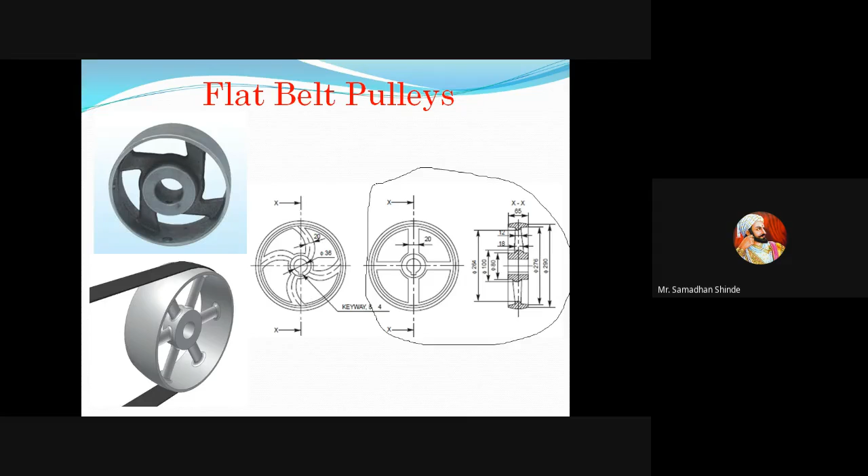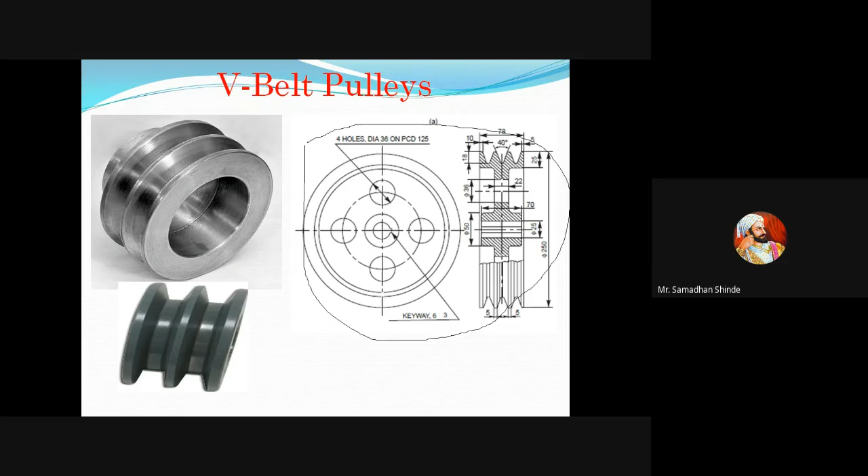Then V belt pulley, another simple pulley. So what is this? You can see simple V belt pulley. Compared to flat belt pulley, if distance is less, in that case V belt pulley is used.

Then speed cone pulley, which is of two types. Why is it called a speed cone? In first term, maybe in graphics you have seen, if there is a cone, this cone is there, front view I will draw. If you cut this, it is called a frustum. Frustum may be something like this.

That speed cone pulley is for flat belt. Why is it called so? To get different speed. If in this diagram belt is there on lowest diameter, what will happen to the speed? This is condition one, belt is on the lowest diameter.

And if I keep this belt on here, so in which case will RPM be more? Case number one, belt is on lowest pulley diameter. Case number two, belt is on highest diameter. In which case RPM will be more, lowest or highest? Lowest. So in this case, we can say RPM will be highest in the speed cone pulley.

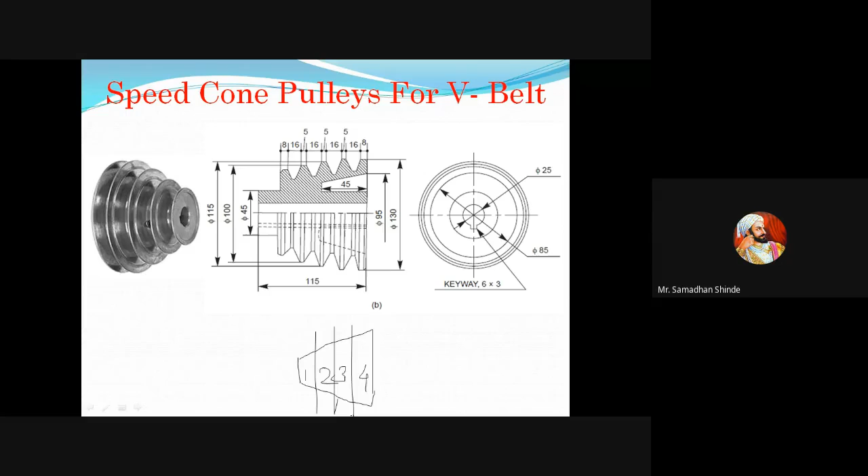So it is also used to get different speed. This pulley is used again for that purpose, similar to the cone. It is something like a cone, like this. Diameter 1, diameter 2, diameter 3, diameter 4. Such type of pulleys are available in our workshop, once you want to change speed.

You can see that also. Then fast and loose pulley. So what is this? You remember, whether you have seen engine crane on wheel, fast and loose pulley.

So the mechanism I will tell. What is the mechanism of this fast and loose pulley? There is one shaft on which two pulleys are mounted. One is like this, pulley number 1. Due to space, I will draw a little small diagram. Another pulley, maybe like this. Suppose two pulleys are mounted, pulley number 1 and pulley number 2.

One is fixed with the help of key. Here key is used to fix this pulley, key, so I will write here K. And here bearing is used. So what is this fast and loose pulley? What is the mechanism of this?

One pulley is fixed with the help of a key, another is fixed with the help of a bearing. Suppose a belt is there on this pulley. Whatever speed of the shaft is there, with the same speed this pulley will get rotated, or whatever speed of the pulley is there, with that only the shaft will get rotated. So it is not the case. Once we fix the shaft here and the belt here, if the pulley is going to rotate, the shaft will not rotate. That's why it is called a loose pulley.

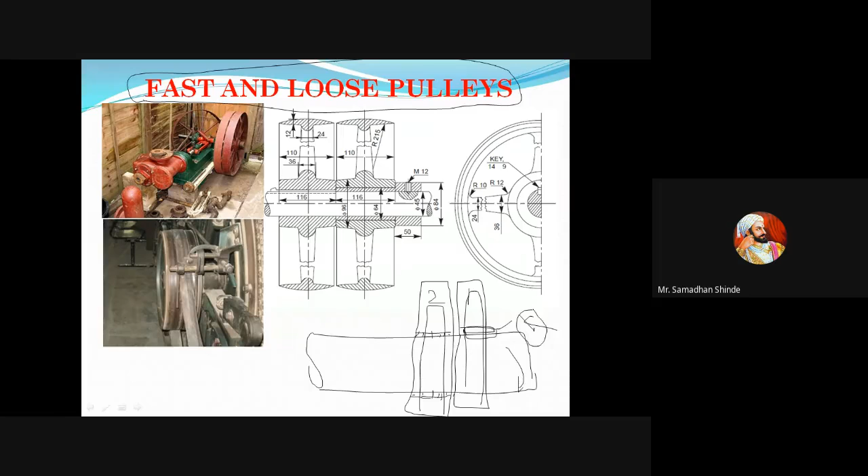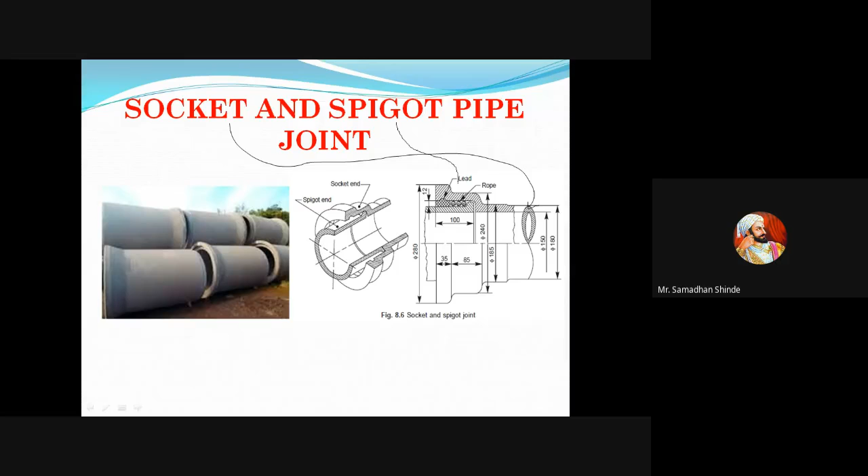This type of socket and spigot pipe joint you might have seen everywhere. Socket and spigot type pipe joint, as we have seen, is also called socket and spigot joint or faucet joint. One end is converted into a socket, the other one is a spigot. So here a key is not used. This is the socket, and this is the spigot.

Then, probably the last point from this chapter: standard pipe fitting. What is standard pipe fitting? Once we are going for piping in our farm, etc., the components which are used in our day-to-day life for piping are called standard pipe fittings.

So, T joint: when we want to have branching in our pipe, this T is used. When is T used? For joining three pipes at one place, or in general, when we want a new connection, meaning we want branching, or when we want to increase branching. This diagram shows a T, and you have to remember it.

Branching means there is a pipeline. Suppose a pipeline is there like this, and you want to have one end here also. So you can cut the pipeline here and use this T. You can use this T and have one more pipeline, so your pipeline continues like this, and still you want to have one end here.

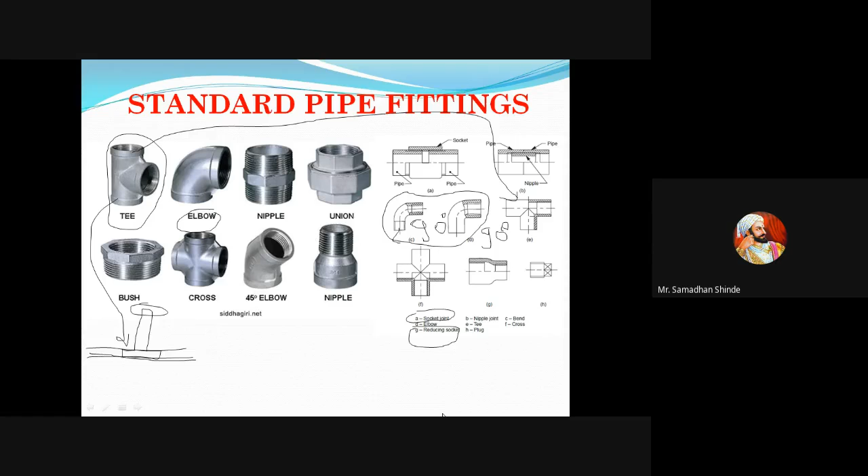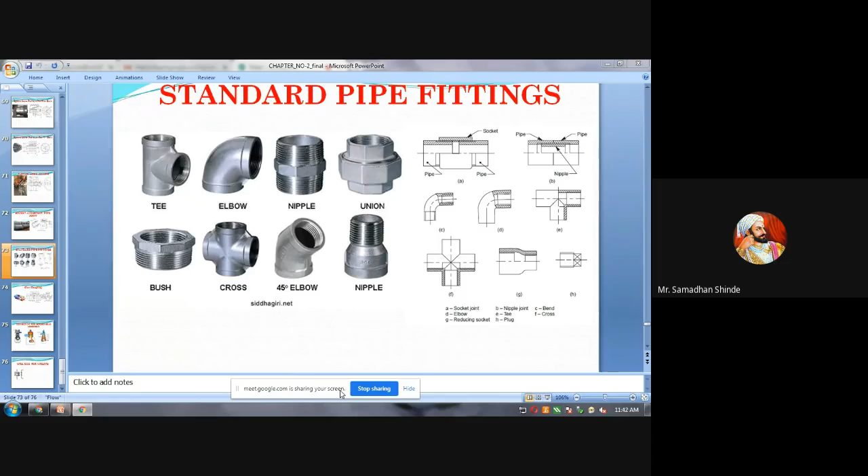And the last part is plug. When we want to stop a pipeline, in that case this plug is used. Plug, or we can say it is a cup or cap, it is also called a cap.